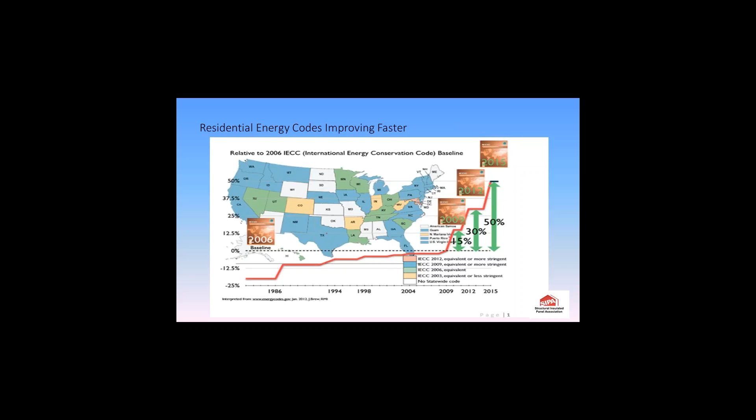Also, as you see on this slide, the 2015 code was actually the first time, since the energy code was published, that they split the residential code out of the energy code, making it freestanding. It's also Chapter 11 of the residential code, the IECC-R, the residential version.

The 2015 version also incorporated the HERS index as an equivalent for residential, which was good because it's some sort of standard that was out there, although at the time it was somewhat of a proprietary standard. But it gives builders - and it did for myself working in Energy Star programs - good metrics to put homes together on a holistic basis, and gives you values for equipment and advanced components such as SIPs panels.

So these are just some of the other changes that were incorporated. As you see at the bottom, the 2018 Energy Code review has already begun. We've already had a number of conference calls about it. The Energy Code meeting will be in April, and the whole process starts over again. So we're already looking at proposals to modify the code going into 2018.

You're also seeing it incorporate some of the technologies that are out there. Of course, structural panels have been part of the residential code for a number of years now, so they have their own method.

As I mentioned earlier, there's also some federal action this year - the Clean Power Plan rule. That was enacted from the current administration, the White House level, but it's enforced and promulgated by EPA, and they're looking at energy efficiency programs, increased codes, trying to create more local programs, and engage utilities and that sort of thing. That was launched in September. It's been challenged in courts. Something will come out of it, but it's still pretty much up in the air where that rule is going to land as it impacts our industry.

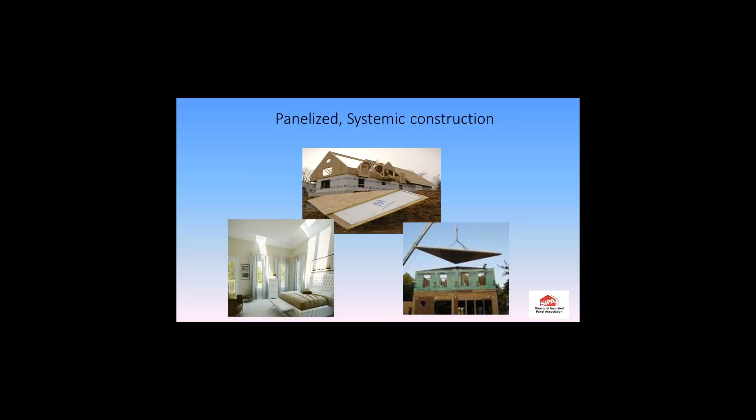You're also looking at envelope performance requirements, again not only for energy but for durability—increases in wind speed design and similar factors. With all the natural disasters we've had over the past few decades especially, these have worked their way into the building codes to pull buildings together and make them tighter from the elements, so they perform better thermally, but also tighter in construction for resiliency when it comes to wind loads and things like that.

We're in the St. Louis area, right in the middle of Tornado Alley, and also in the New Madrid seismic zone, so we're in essence building bunkers that look like homes here. It's cost effective to do as long as we get our process down—we can manage it very well, and obviously the end product for that client is much better that way too.

This picture of the house on the slide was actually Green Builder Media's, Green Builder Magazine's, vision home back in 2007—a LEED Platinum home that was put together. You can see Intercept's name proudly displayed on the building wrap, so they were part of that project too.

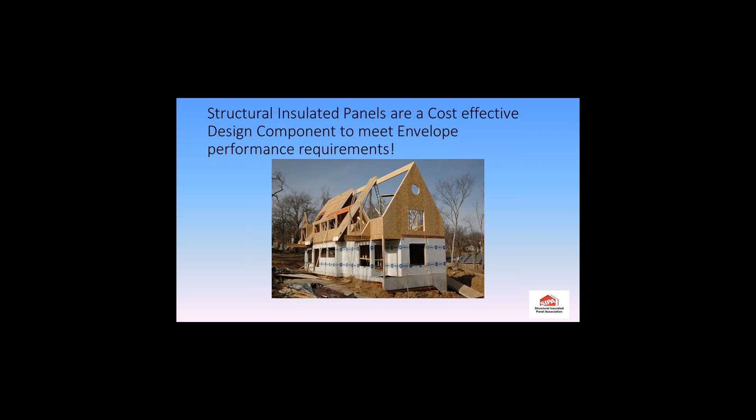The nice thing was, with the speed of construction, we were up under roof with this house in just about a week. And once it's up, it's already insulated, so all we did was close off the openings. This picture was taken in January of 2007, and it didn't take hardly any heat at all to keep that house warm. The guys finished framing out the inside working in T-shirts, and that's the finished product from virtually the same view.

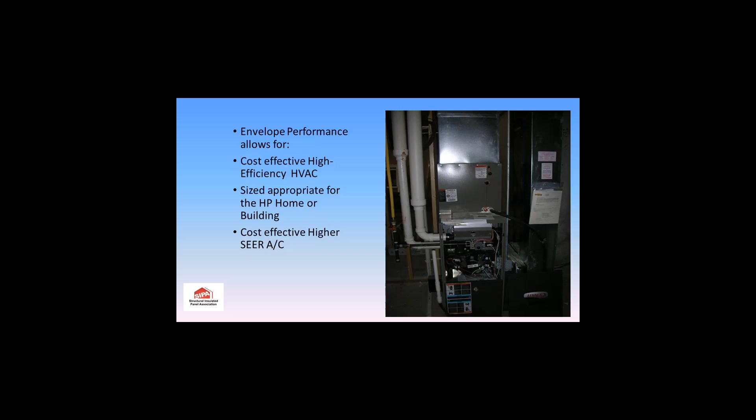They maintain, they last longer because they don't work as hard as their traditional counterparts, and they run on lower speed motors. They don't use as much energy, but they do turn the air over in the house more frequently and draw it across those filters more often, so that also helps with the indoor air quality.

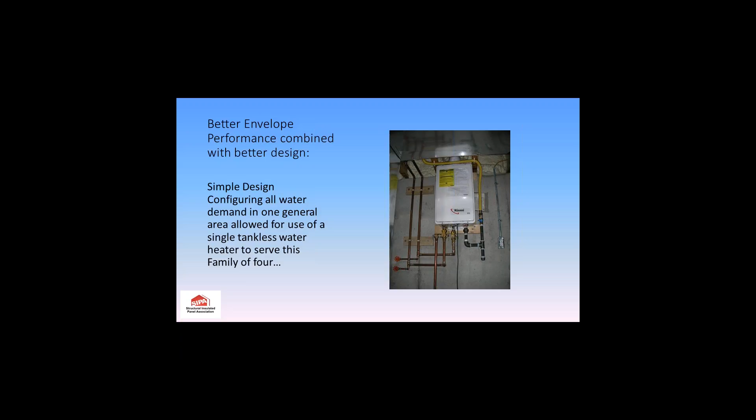Through good design, we were also able to design a water system that was very efficient in here. That one Rinnai tankless water heater served the entire house, a family of 4. Just the kitchen, bedrooms, and baths were all aligned in the central corridor of the house, so we served those all with that one water heater. It's done very well over the years.

So we'll talk a little bit about simple building science and why it's so important to focus on these, and the ramifications if you don't, and why SIPs are such an easy answer to dealing with these situations. Obviously, water is the builder's worst enemy, whether it's bulk water in the form of rain or water vapor with air movement.

When it's like today here, it's about 50% relative humidity or so. That means the air is about half water with the vapor component in there. So when that air moves through the walls, it's bringing that moisture in with it. We just need to make sure we use a good envelope to mitigate that airflow, and then we can deal with the trace amounts of vapor that may be in or outside of those walls.

Obviously, we want them to be resilient for the elements that are outside, whether it's seismic resilience for earthquake zones like we're in, or in high wind zones, around the coast with the Gulf areas, or here in Tornado Alley, or anywhere it seems you may have wind issues. And of course, the thermal performance is huge.

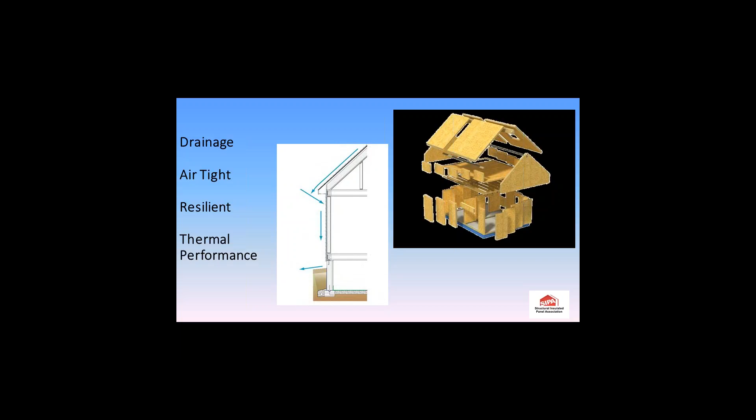You have the airspace behind the brick wall that will hopefully allow for drainage down the backside of that masonry wall and airflow to dry that cavity out. You also have moisture drive - if you get that brick wet and the sun shines on it, that heating effect will drive that moisture through that brick. Then you've got to worry about the transfer of air.

If you have moist air behind that brick veneer and a lesser ability for that wall cavity to resist air transfer, that air is going to transfer into that space, carrying that moisture with it. If it's a good, hot, humid day outside, like we have here 4 or 5 months out of the year, and you're cooling on the inside, you may create a cool space on the inside of that drywall where that vapor-laden air could condense, and then you have moisture inside your wall.

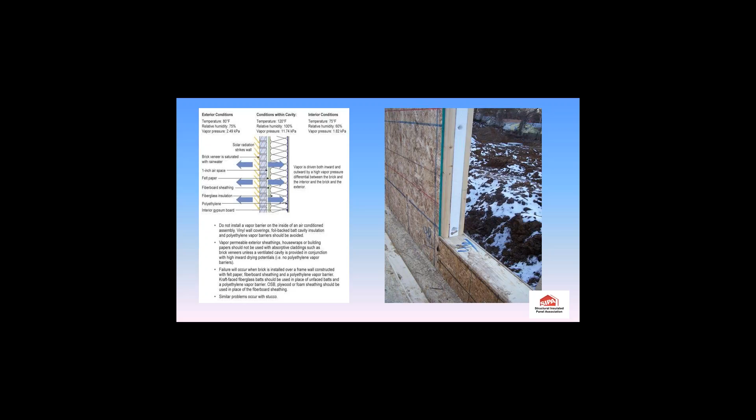Same with the carpenters in the assembly - they were actually anxious to do this so they could learn this technique, and now they're one of the few subcontractors in the industry in our area that are well experienced in building structural insulated panels. As the use of these panels has grown in the market, their business has expanded almost exponentially, because for a long time they were the only game in town. Obviously, their competition's taking notice, and they're getting their guys trained also, to the point that the carpenter - we're a union carpenter town - and the Carpenters Training Center have now incorporated SIP panel construction into their training. That's a good thing for all of us, because it grows the market.

You may have seen these slides before - they're from the guys that are really the true experts in our industry on these types of subjects, from Building Science Corporation. It's an example of moisture flow with the water vapor in the air when you have holes in your walls, which happen in the construction process, or gaps, or the ability for that vapor-laden air to transfer through, either into or through that wall.

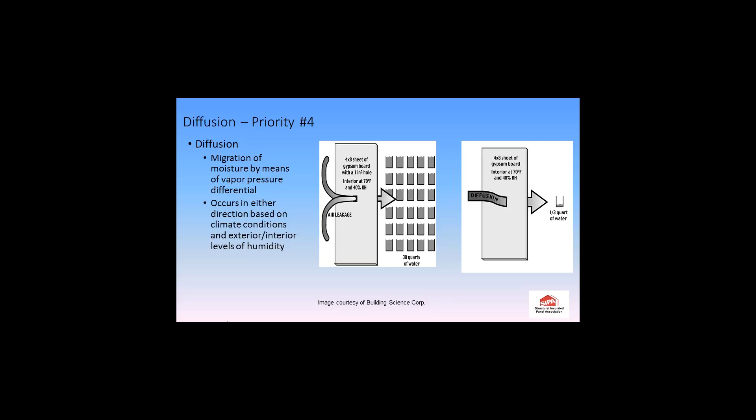And obviously, if you have a condensing surface, or the dew point is inside that wall, that's where that water gets trapped. You can see it's fairly dramatic—it shows the amount of water that can travel through a small hole or gap in a wall, and why it's so important to make this construction as tight and as resilient as you can.

So this shows here again that same slide, and that same cross section of the structural panel where you have that dense foam as your wall cavity. So it is more resilient as far as air and moisture transfer goes too. It is a great way to mitigate those air and moisture transfer problems.

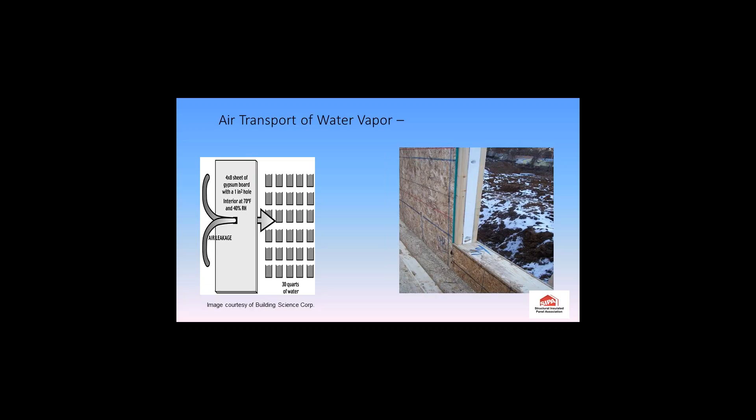This is a quick description on how this sort of thing works, and the resilient nature of these panels from an air and moisture transfer standpoint. Most of you have hopefully heard about the PERM ratings of different building materials and how they're assembled, and this is what controls the transfer of air and moisture through those materials.

So this just shows the typical skin on a structural insulated panel is made out of OSB, oriented strand board. And the reason this is used so predominantly in construction right now, there are multiple reasons.

It's the way that trees are harvested for use now, also including a lot of hybrid trees, where we can create a tree that will grow to harvestable size in 7 or 8 years, where Mother Nature might take 24 years to grow a tree to that same size. So we can harvest it, making it more of a renewable resource.

However, when you grow a tree to harvestable size in 7 years, you cut it and look at the end grain, and there's only 7 growth rings in there. So it is a less dense log.

However, we can take that log, grind it up, use all the components, and compress it back together with a low VOC but high strength epoxy. That's why you see a predominance of OSB, oriented strand boards, more engineered I-joists, and structural items too. It is a pretty effective way to do that.

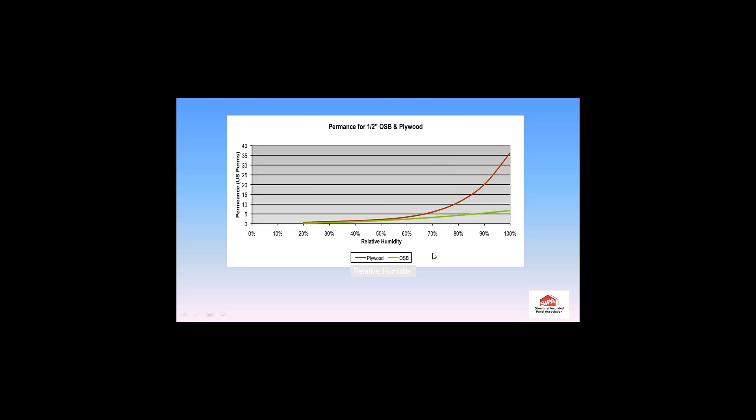Obviously, airborne water vapor, radiation and UV degradation we hadn't touched on, but the fact that when buildings are framed up and their materials are delivered on site and left out in the sun—it is amazing if you ever have the chance to take the building science course through EEBA or through Building Science Corporation. They have some great demonstrations on UV degradation of building materials if you have them out in the sun for very long before they get enclosed.

The cell damage for that, because the wood structure, wood framing, is a cellulose material, and the cell structure damage it does degrades the structural capability of those elements—it's pretty significant. So being able to get a building up quickly and enclosed quickly is a bigger thing than most people realize.

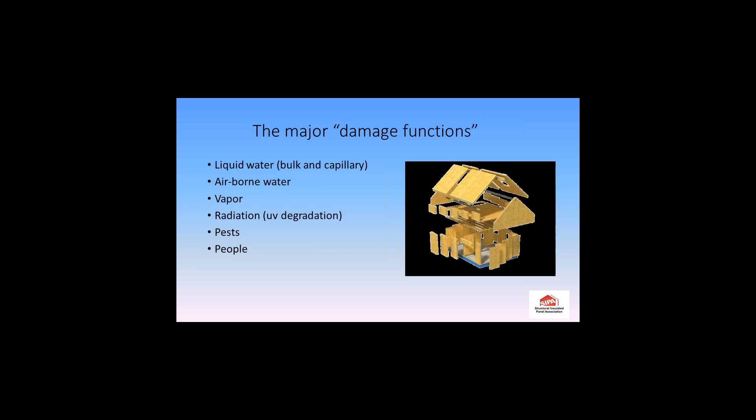So, to have them be resilient for all the environmental concerns plus normal use, between woodpeckers and squirrels and whatever else may try to attack your house, and then everyday use between people and pets. Resiliency is a big thing, not only for the life of the building through the construction process, but the life of the building itself.

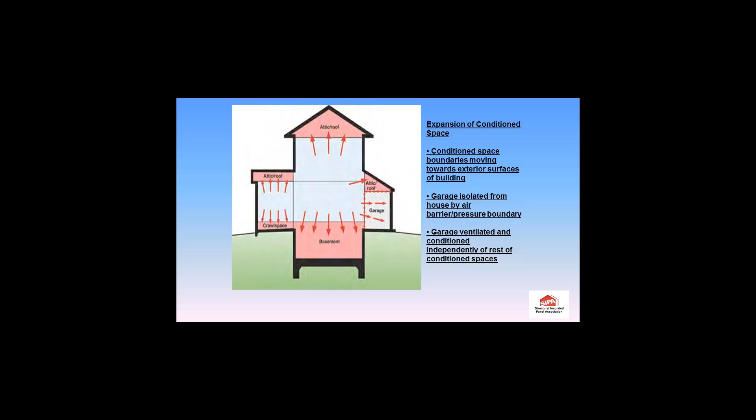This is a good subject we address with the operation of buildings. When that HVAC system kicks on, it literally pressurizes the inside of that house, and since we're building homes much tighter now than in the past, it's an even more pronounced event. But the resilient nature of SIPs panel construction, that tight, systemic build, makes them much more resilient. This doesn't just happen when the HVAC kicks on, it happens over the life of the building, so internal pressures are significant, which is another argument for a properly sized HVAC system. So the major protection systems in the house need to be systemic, comprehensive, and continuous, using best practices.

I always tell builders, quality in building is like hustle in sports, you never look bad when you do it. Addressing all of these items comes down to three methods: design, materials, and workmanship. The better the materials and workmanship combined with good design, it's a win-win.

Obviously quality control is everything. A guy told me years ago, you don't get what you expect, you get what you inspect. So testing for moisture issues before you cover them up, making sure you check your flashings, this is where above-code programs and checklists help with that quality control. And then the final testing, blower door testing, and commissioning if you want the building certified, which we do simply from a liability standpoint.

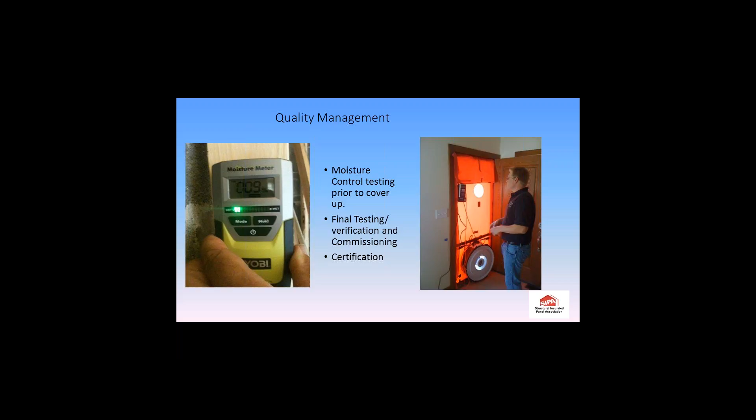It's a great sales tool, but third-party certification is also a great liability protection tool, and very inexpensive to do. Now I'll touch quickly on ventilation and indoor air quality. With a better building envelope, a good air sealing package, and proper HVAC design and installation, the V in HVAC, ventilation, is as important as the H and the AC, frankly.

You may add an energy recovery ventilator or heat recovery ventilator to help with moisture control and heat transfer, so you're not wasting your paid-for air out of the house. It captures heat out of the air you're exhausting, or tempers the warm air you're bringing in during summer, cooling it a bit, making that equipment perform more efficiently. It starts with a good building envelope, because then you can put smaller, appropriately sized equipment in, and it performs well and lasts longer.

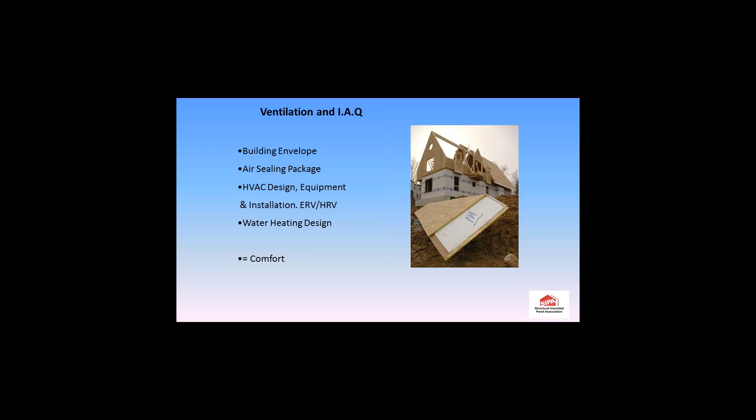And of course, water heating design. Twenty percent of energy use in a building is for heating water, and now that's mainly for the master shower, since we're using Energy Star dishwashers, washing machines, and similar appliances. So water heating design is a big energy concern too, but with proper design it's much easier to address.

And of course, we're talking about healthy homes and buildings. As I mentioned, when I was a code official back in the 80s, the indoor air quality issues that happen because of how we tighten buildings up are a hugely important part of the process that needs focus throughout design and construction. But it's much easier to address today because of better building components, such as structural panels, and the lack of off-gassing since they don't have added formaldehyde like they did back in the 80s, plus better building science overall.

We can build a much better building today than we could just 10 years ago because of the advancements in the building components we have.

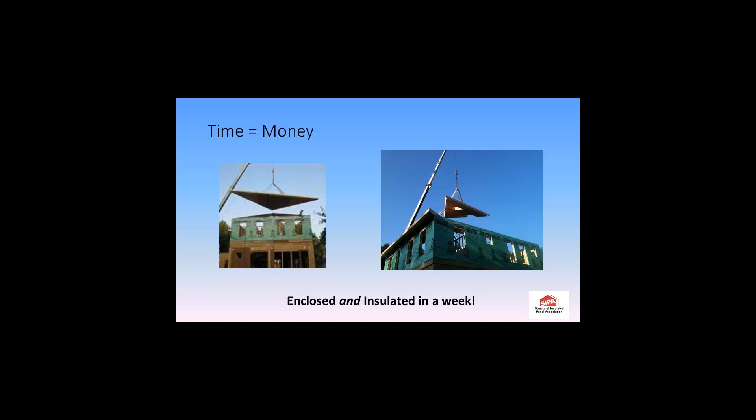And as I said earlier, time is money. Being able to get things enclosed and insulated in a short period of time is better, not only for the components and the end result of the house, but it just saves time. Instead of taking a month to stick-frame something, we're up in a week, so that's always a good thing, and we're cost competitive too.

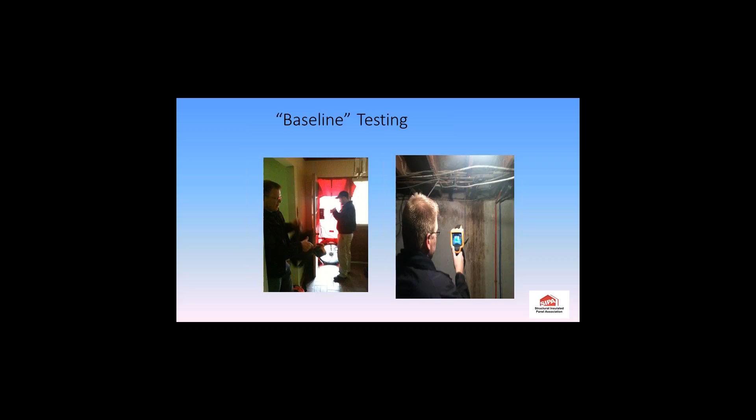This was a home that we remodeled just a few years ago. It was built in the 50s. A young couple owned it—it was his grandparents' house. They had bought it out of the estate after Grandpa died and wanted to remodel it. We basically took the roof off it and put a second floor on.

We used structural insulated panels to line the inside because we didn't want to change the architecture of the home. It was a fully masonry constructed home, so it had some pretty good resilience to it, but then you have the issues that masonry construction may have with vapor transfer and things like that. So SIPs were an easy answer to make this home perform.

You can see this was an email he sent me after. Obviously, they had the energy bills from when their grandpa lived there, so he was able to give us some apples-to-apples comparisons for what we had done for that house. We basically doubled the square footage of it and cut the energy use in half.

We took a 4-ton forced air HVAC system, furnace and air conditioner, out of there, and put a 4-ton geothermal system in—same size system, only double the square footage of the house. We did a better job on the envelope too.

And this was the email he sent me—they added a little bit of solar that they leased on the roof, and he ended up with about 3 times less energy use with twice the square footage. So it was a cost-effective way to do this.

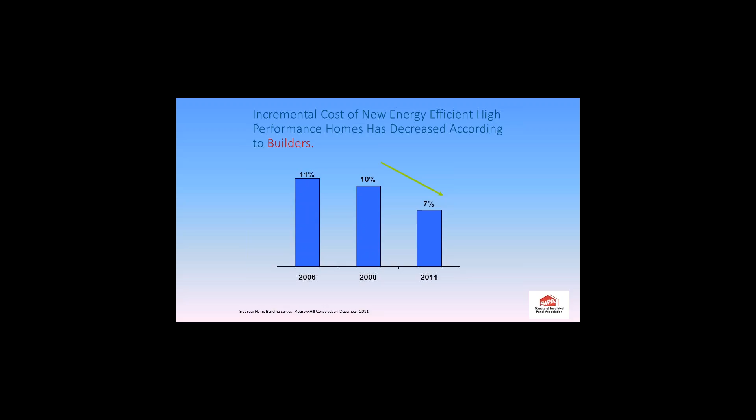This is results from a survey that McGraw-Hill Construction did a few years ago. You can see where the incremental cost to build these homes has decreased for builders over the past, really going on almost a decade—this was a period of about 6 years when they did this survey. And it's even lower for builders to do this, and the reason is because it's their process. I was asked a lot if I build a high-performance home or not a high-performance home, and I'd always jokingly tell them I don't, because I'm not smart enough to do both.

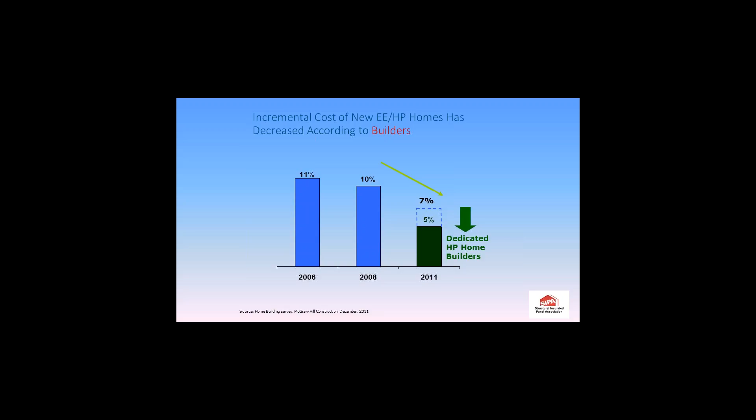Frankly, once you get your process down, that's what you do. You use the metrics outlined in the Energy Star checklist or the ICC 700 National Green Building Standard, and you get your subcontractor up to speed on doing this. It's just how your process goes. So the incremental cost is much lower the more of these you do, and using a systemic construction method helps that equation too.

The impact on marketing has gone up significantly. That has a lot to do with more educated consumers, which is a good thing. It's significant for firms dedicated to this sort of thing, because those are the go-to guys that consumers will look for. You'll hear a builder say, well, nobody's asking me for it. Well, that's probably because the people looking for it have already found the people they want to do that home for, and those are the guys focused on doing just that.

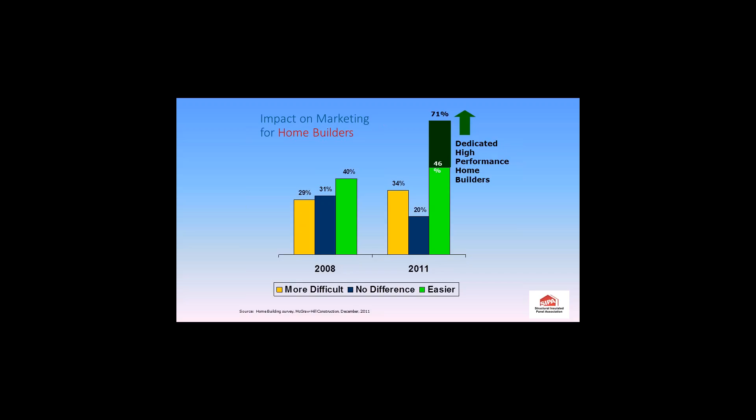And again, it comes down to cost. The client's budget is everything. Their bottom line is your bottom line. You can achieve it through a right-sized home, through better design. We can take a 2,500 or 2,400 square foot home and make it feel like a 3,000 square foot home very easily, just through better design.

And then focus on the important things to them: comfort, durability, and resiliency. We have to be competitively priced. The competition sets our price. The only thing we can control is our cost, really. And we do that through our process, as I showed you before.

But then at the end of the day, the energy savings and reduced maintenance that are intrinsic to these better built homes is a cash savings, which amounts to equity for these clients. If you look at a monthly payment as a pie chart, by far the biggest portion is the cost of the house: principal, interest, taxes, insurance. The next bigger slice is energy and maintenance, and that's the part of the pie we focus on.

We can cut that part of the pie in half immediately using better products like structural insulated panels. They're more durable, they've got much less energy use, and most every consumer lives on a monthly payment. So we can demonstrate to them that by having a little bit more principal in that house, 2% more principal, we can save them 35 to 40% on the energy, operation, and maintenance side of the equation. So the trade-off is real. The numbers don't lie, and neither does the science.

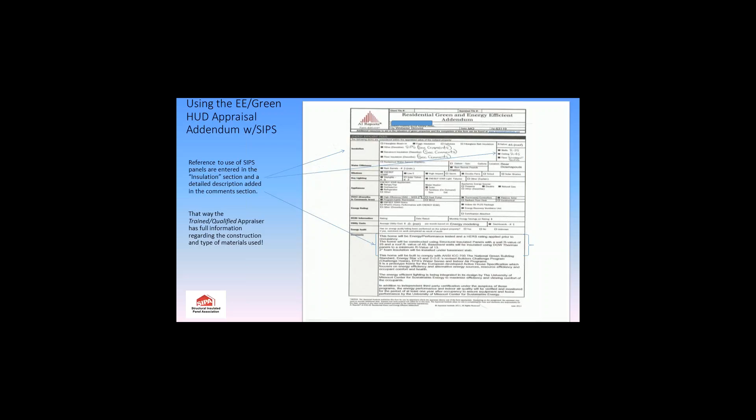But what this does is keep you from being comped against a short sale down the street. This makes them look at this house in a systemic fashion and gives you the value for that structural insulated panel envelope or that geothermal system. It costs a little more, but it's worth a little more, and this gets you closer to the true value of those sorts of things.

They have constant, and actually a little bit better, utility bills now because they've gotten used to operating that house, and they really know how to tweak it to make it operate even more efficiently than they first got in there. And of course, that extra value is just nothing but equity to them.

So very quickly, some key takeaways: at the very bottom there, you see how the codes are contained. This is true for this 2018 edition of the codes. They're continuing to accelerate the envelope performance requirements, which makes SIPs even more attractive to builders like me, because once you incorporate those into the plan, all those performance requirements are not only met, they're exceeded, which means they'll stay met for a long period of time.

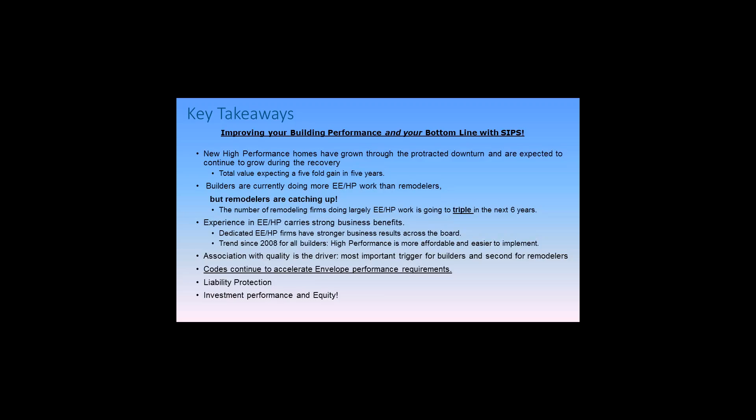So we'll wrap up here real quick. If there are questions, I'm happy to take some time to answer them.

It's not a linear process like it used to be, where you go select a lot, the house plan, the cabinet colors, and the paint colors and things. It's all integrated systems now, which is a much better product at the end of the day. It helps our industry because we're building better products.

Affordability is key to sustainability. If it's not affordable, it's not sustainable, but it also needs to be affordable for the life of that building. Most people buy a home and don't even think about closing costs, much less what it costs to live there for the life of that building. Well, this is reining that part of the equation in.

As I mentioned earlier, the Structural Insulated Panel Association has SIP School, and there's the link to that, sipschool.org. It's a great training program. There's a lot of online training. Go to the SIPA website, sips.org, and there's a lot of great information there on how to contact these folks to get engaged with this.